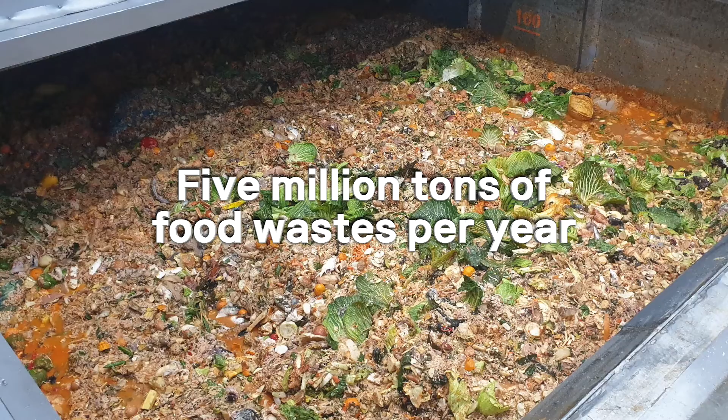The Earth that suffers from various trashes thrown away by humans, South Korea. Of those trashed, 5 million tons of food wastes are yearly discharged over the country, and the disposal cost alone accounts for 14.9 trillion won.

Changes for a green Earth. Challenges for a better tomorrow. EM Solution, a leader in the eco-friendly energy business, is positioned at the center.

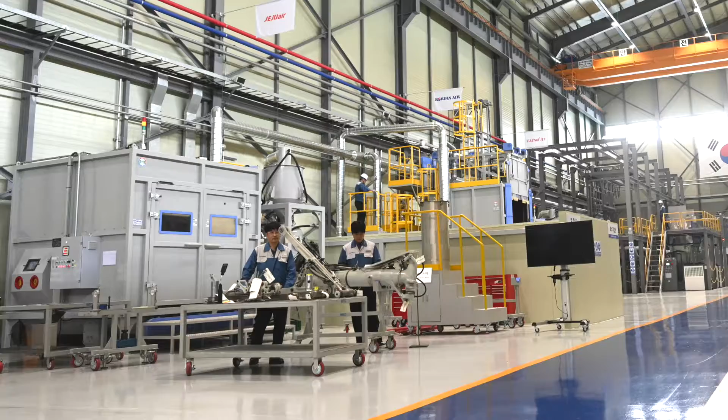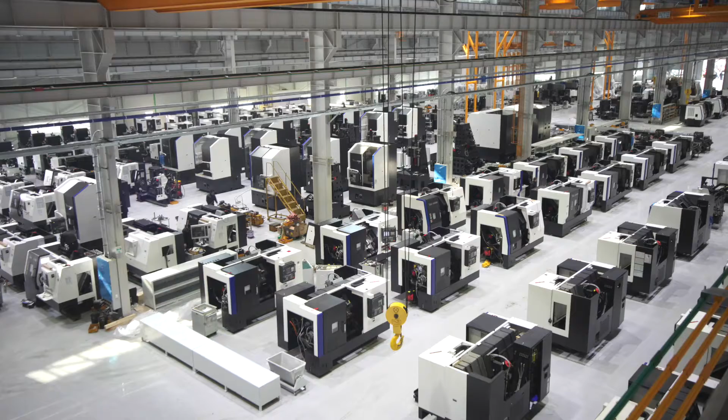EM Korea, a parent company of EM Solution Company Limited, manufactures products in various domains such as military industry, aviation business, machining tool business, power facility business, and TBM business based on its cutting-edge and high-precision processing technologies.

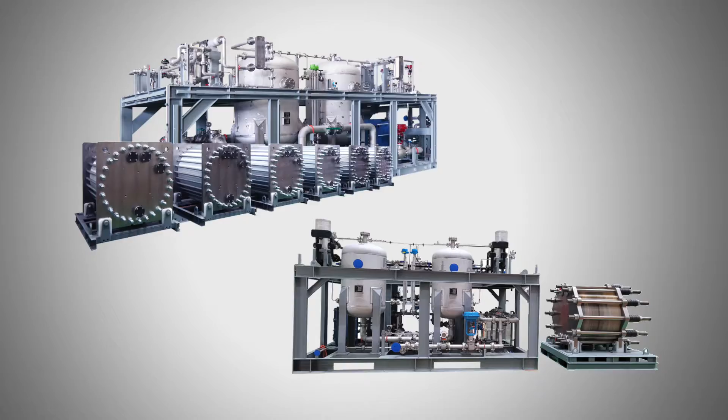EM Solution, which was a spin-off from EM Korea as a subsidiary with a specialty in the environmental field, is one of the hidden champions that leads the relevant industry through the innovation and excellent technologies in water electrolysis hydrogen generators, hydrogen stations, and food waste disposal facility.

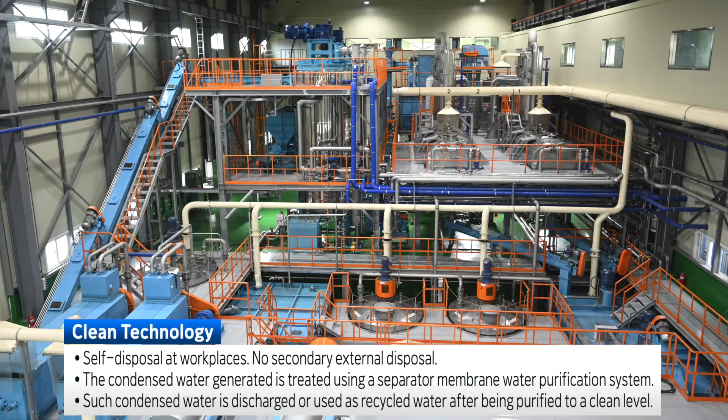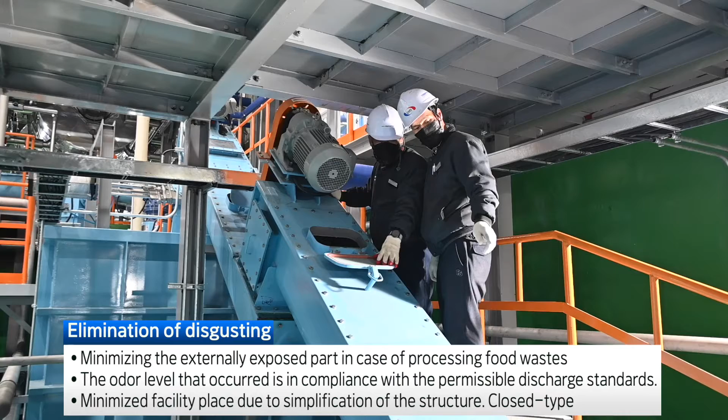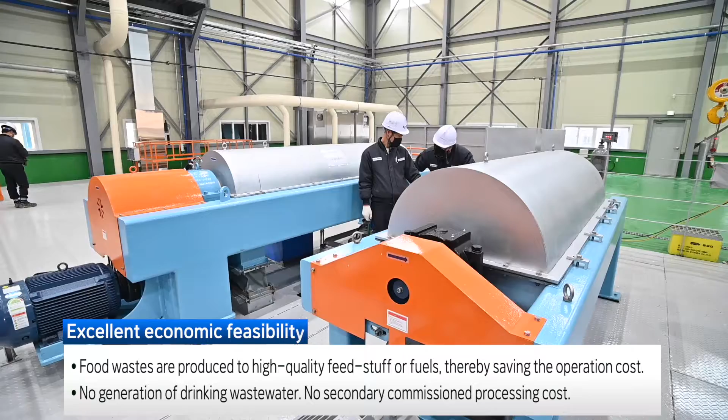Due to the entire process of negative pressure facilities, no odor is created, thereby minimizing complaints from the public and providing a pleasant working environment. Bio-oil extracted during the process and byproducts that remained after the final treatment are produced as feed or fuel, thus reducing operating costs.

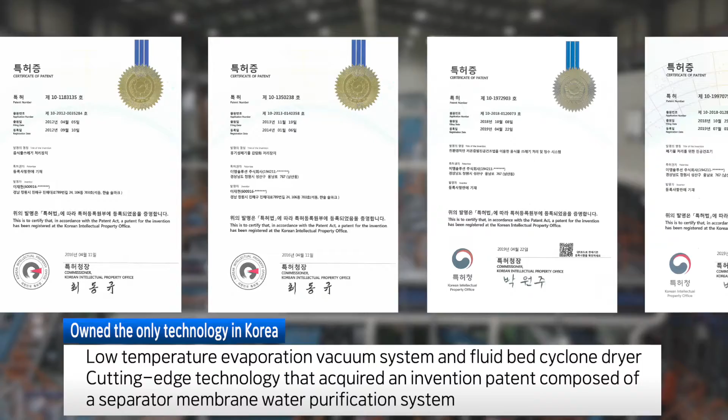The system, which is composed of a low-temperature evaporation vacuum system, a fluidized bed cyclone dryer, and a separation membrane water purification system, is highly praised for its cutting-edge technology that acquired an invention patent.

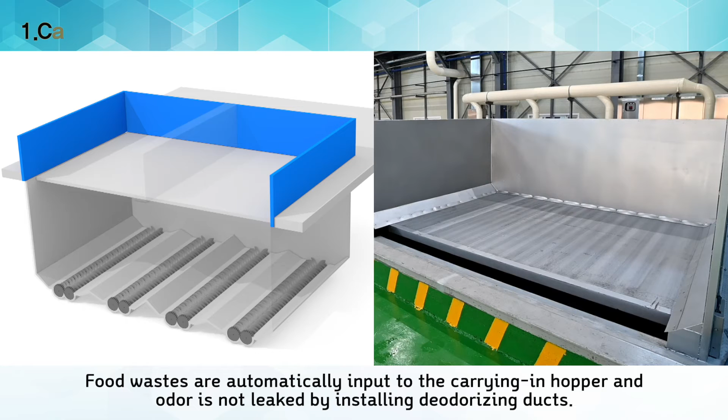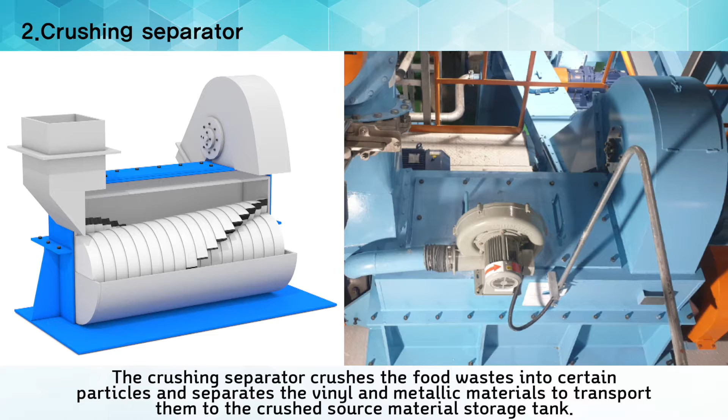Food wastes are automatically input to the carrying-in hopper, and odor is not leaked by installing deodorizing ducts. The crushing separator crushes the food wastes into certain particles and separates the vinyl and metallic materials to transport them to the crushed source material storage tank.

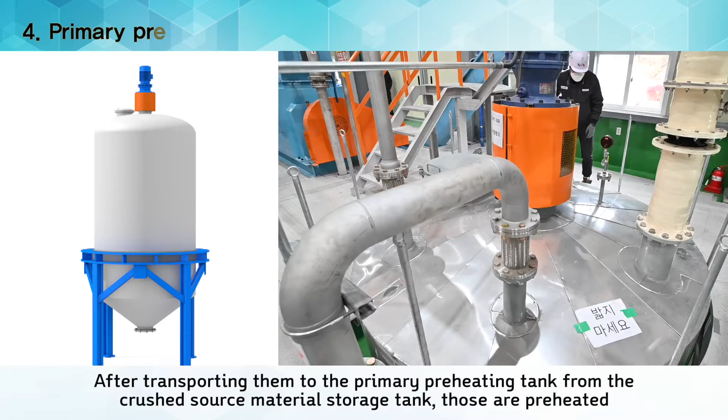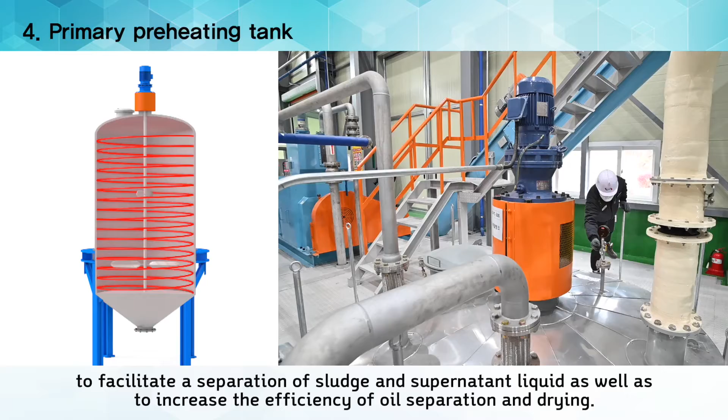After transporting them to the primary preheating tank from the crushed source material storage tank, those are preheated to facilitate a separation of sludge and supernatant liquid, as well as to increase the efficiency of oil separation and drying. Sludge and supernatant liquid are separated in the screw dehydrator. Supernatant liquid is transferred to the phase 2 and 3 centrifuges, and sludge to the sludge dryer.

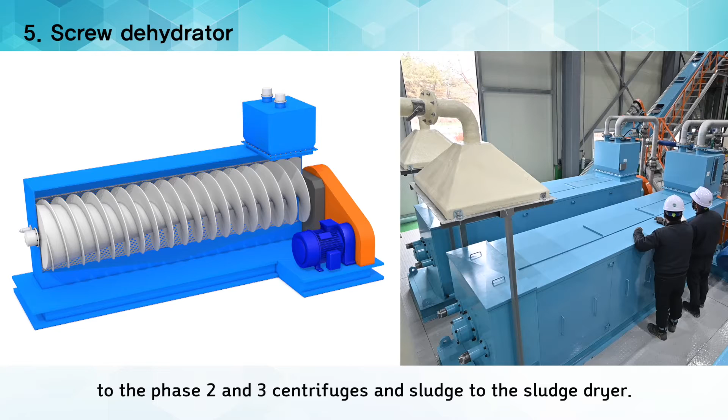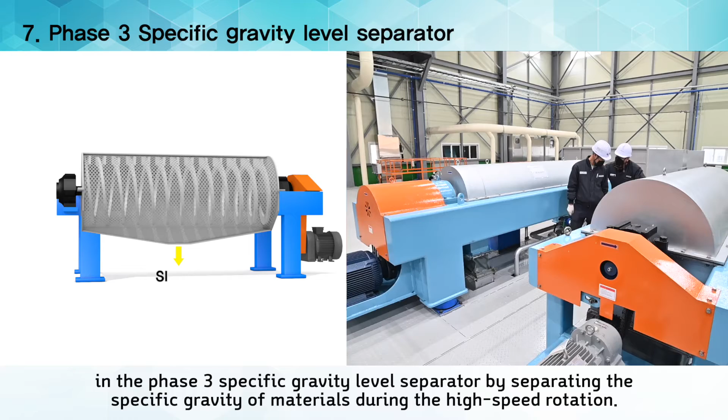The residues contained in the supernatant liquid are eliminated in the phase 2 liquid-solid separator, and oil components are extracted in the phase 3 specific gravity level separator by separating the specific gravity of materials during the high-speed rotation. Then those are transferred to the secondary preheating tank and heated to about 60 degrees Celsius.

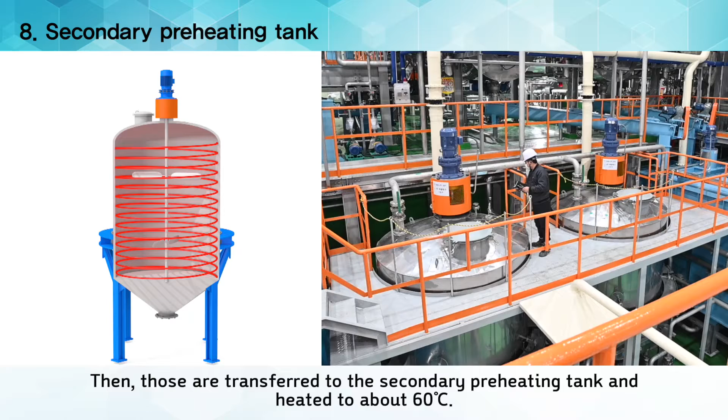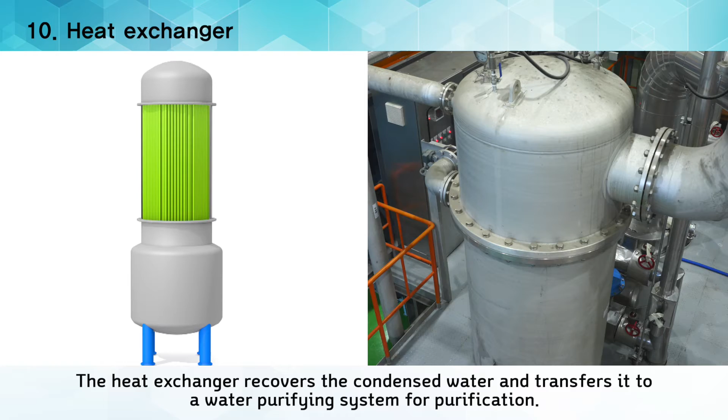The vacuum dryer evaporates moisture using indirect heat that is supplied to the steam jacket outside the main body. The heat exchanger recovers the condensed water and transfers it to a water purifying system for purification. The water pre-treated through the ultrafilter is either discharged or recycled after purification through the primary and secondary membranes.

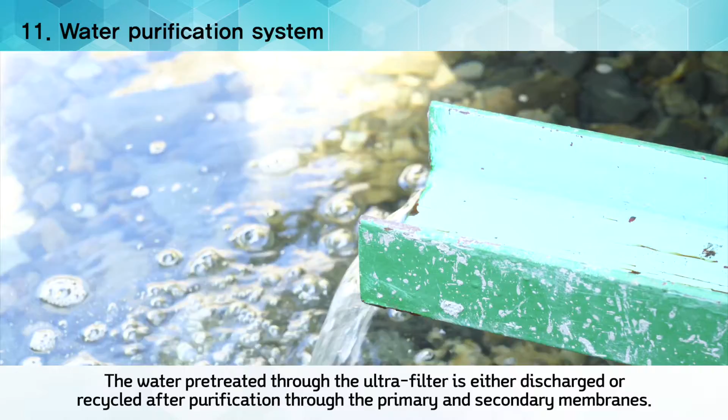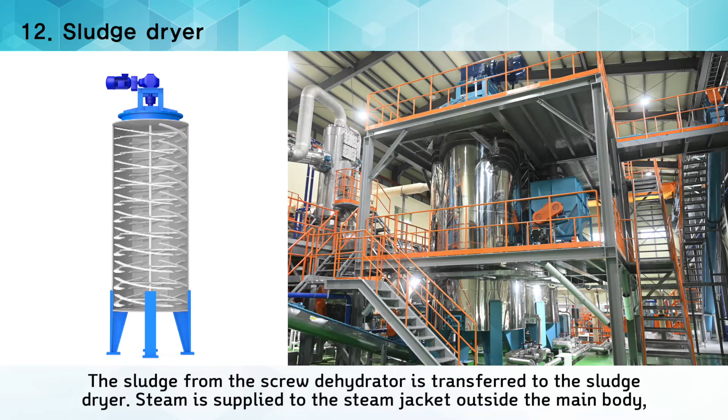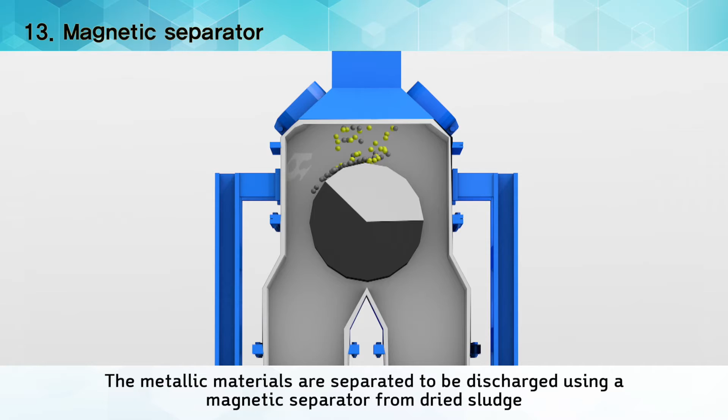The sludge from the screw dehydrator is transferred to the sludge dryer. Steam is supplied to the steam jacket outside the main body, and the sludge is dried by increasing the internal temperature of the dryer above 100 degrees Celsius using indirect heat. The metallic materials are separated to be discharged using a magnetic separator from dried sludge, and the remainder is molded into pellets.

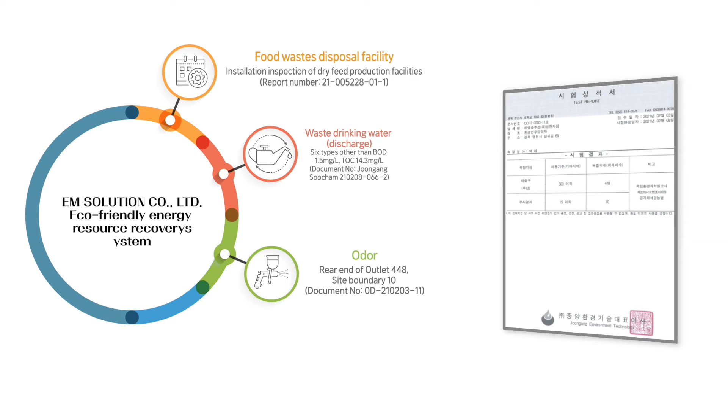As a result of the water quality test conducted by the Joongang Environment Technology, the eco-friendly energy resource recovery system of EM Solution showed BOD 1.5, total organic carbon 14.3, total nitrogen 0.474, and in the odor test 448 at the rear end of the outlet and 10 at the site boundary, and it was judged to meet the standards in all categories.

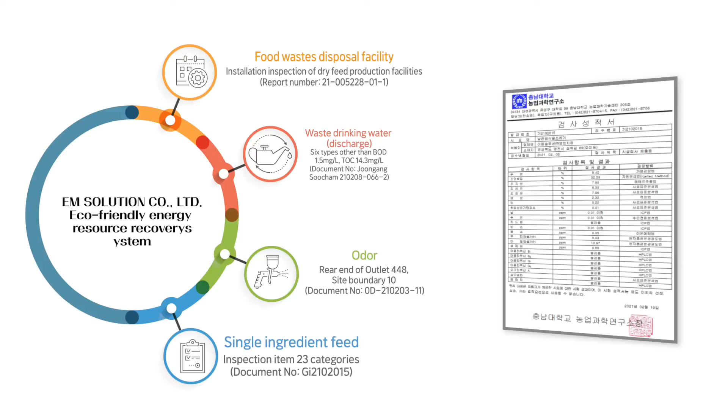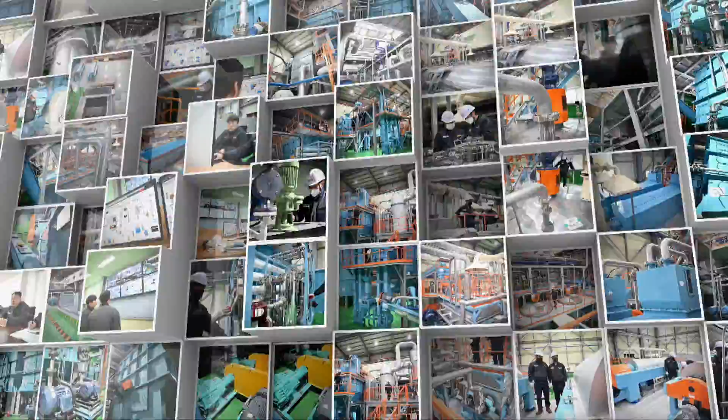Salmonella bacteria and cadmium were not detected in the single ingredient feed, and it was also judged to be suitable in all 23 inspection items. A company that changes the world with a technology to consider people and nature. To make the Earth green further, EM Solution is taking its steps strongly today as well.